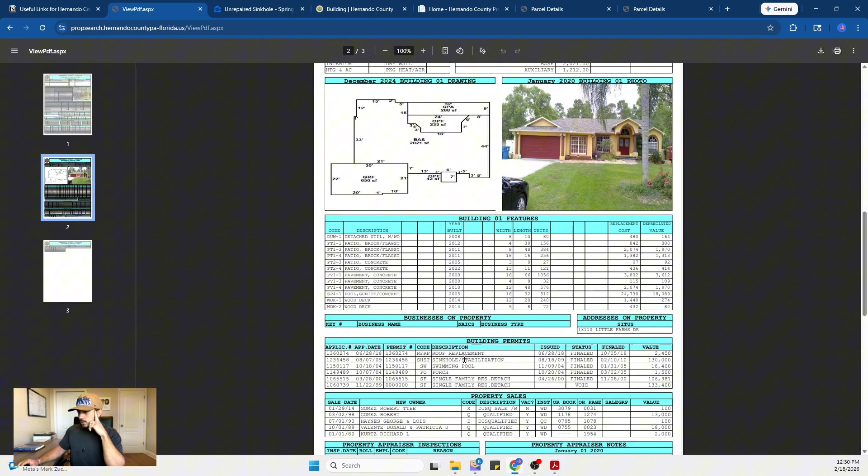Right here, sinkhole stabilization. This is also where you can find other permits, like this one has a roof replacement, a swimming pool, and then when it was built in 2000.

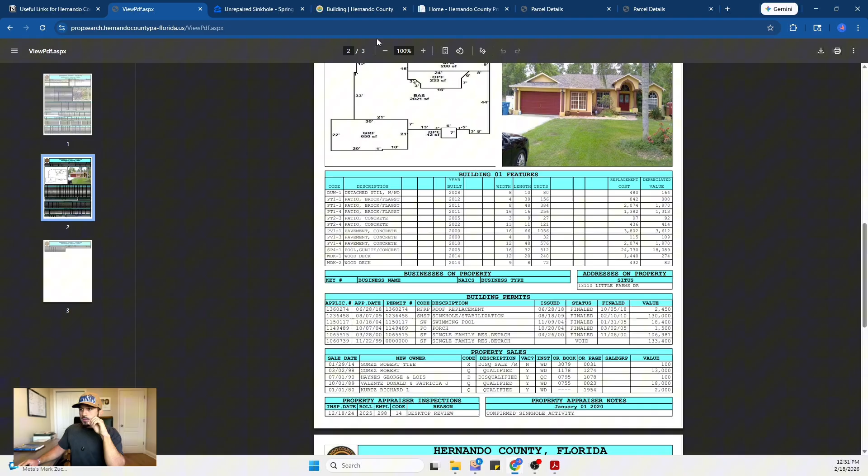To see when a property has an unrepaired sinkhole, like this one, for example, I pulled up this and I have a quick little... what's it called? Tip, I guess you could say.

If you use Zillow, which I use along with the MLS, but Zillow is sometimes easier, especially for unrepaired sinkholes, you could do a keyword search like unrepaired sinkhole or unrepaired settlement if you're specifically looking for them, because it'll be in the description. Typically, the agent will put unrepaired sinkhole or settlement or something like that.

You could also do this for anything. So if you wanted to look up, say, office, it'll show properties that have office in the description.

So not a lot of people know about that, but I figured that could be helpful. Back to what we were talking about though.

If we go to the property page for that property on Lima that I just showed you on Zillow, you'll see that it says unrepaired sinkhole here in red. So that's the easiest way to check if a property has a repaired sinkhole or an unrepaired sinkhole. The property card will not have this disclosure on it. You have to look here, and you can also check the building department.

Of course, when I wanted to do this and pull information from it, they're undergoing an update. They're changing the system, which Hernando County was due for, so that's good to see, but just bad timing as I'm trying to record this video.

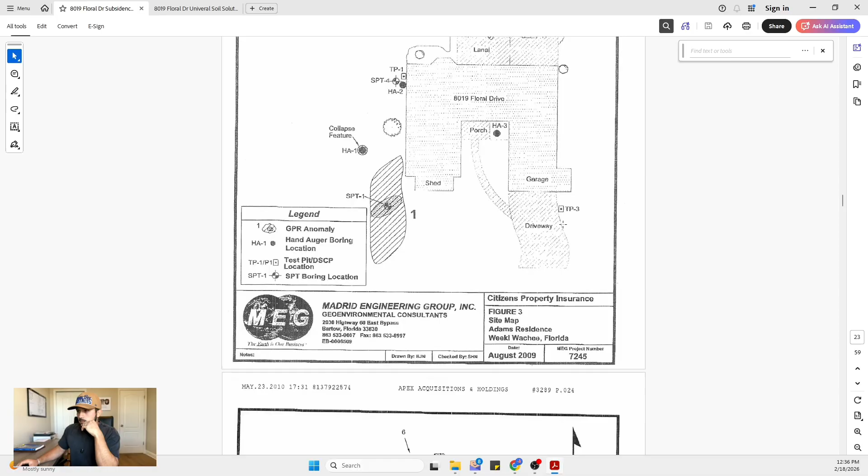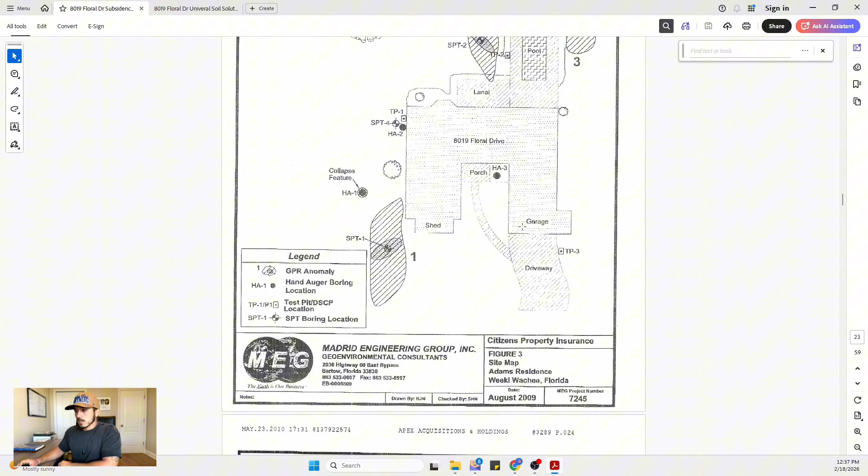This is the investigation report for a sinkhole property. So an engineer, this is made by Madrid Engineering Group. I won't scroll through all of it because it's a lot of words, but if you were looking at a home and you wanted to read through this, you could. It tells you how they investigated the home and what conclusion they came to. And then there are some pictures here showing you what they found. So as you can see here, there were these little voids around the property, and it was enough to say this is sinkhole activity and warranted a repair and a payout from the insurance company to get the repair done. I will just keep scrolling a little bit to show you what else this report includes.

But next we'll look at the completion report and show you what work they did to remediate it. Here's another larger scope, so a hand auger boring log. And this is, as you can see, Client: Citizens Property Insurance. So that is the insurance company that was filing the claim, or insuring the claim, I guess. And then you can see there's notes here: very loose, very pale brown sand, grades to very dense, medium dense.

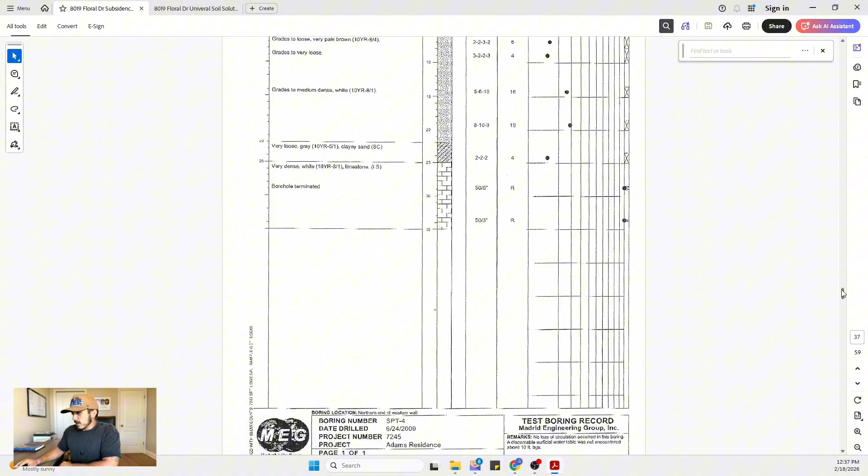It's just very technical stuff, engineering stuff. But if it helps you feel a little bit better, they also have a full writing of what they did here. So this stuff is all available to you if you have a repaired sinkhole property or unrepaired. This will just be the report that shows why it's an unrepaired sinkhole.

Once the property is repaired and permitted and done, you'll get a completion report, and that'll show you and describe exactly what was done. So in this case, there was chemical grout pumped into the property. And then you can see here, this is the cover letter. You have all the pinpoints of where they put piers and chemical grout.

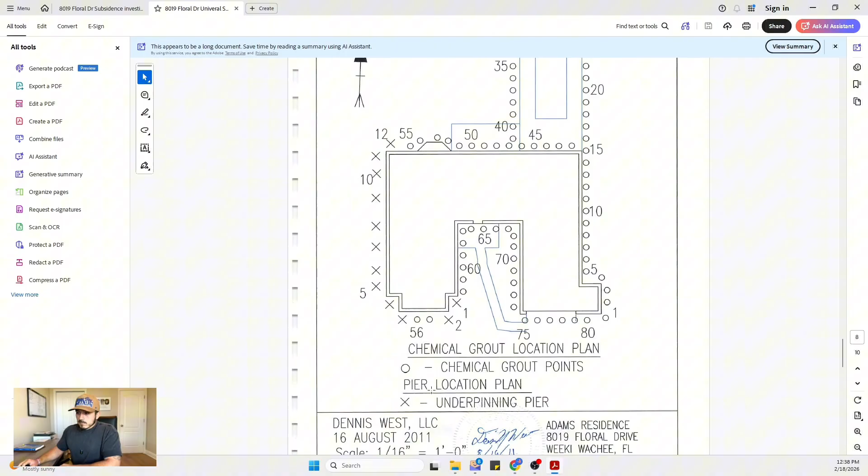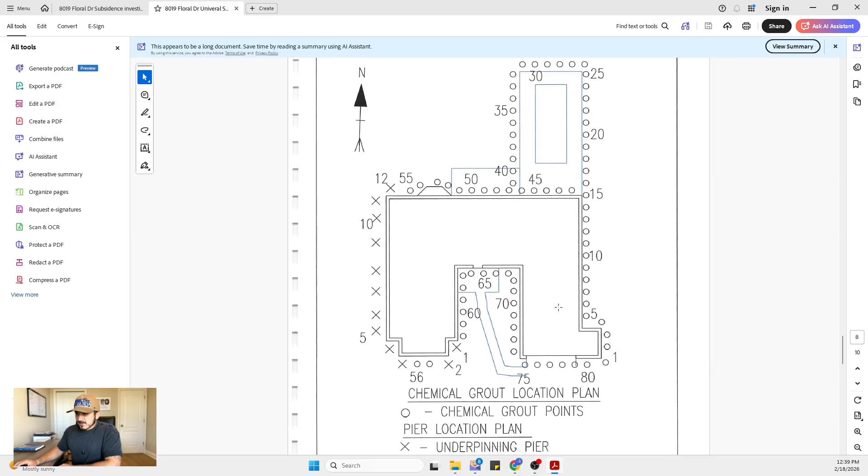So this is an underpinning pier. The X's, the circles are chemical grout points. So you can see what they did to remediate or stabilize the house, so if a sinkhole did happen, the home is secure. So there's prevention, and then with the grouting, and then piers kind of hold the house up. And you can see what was done and how it all works here. It's very technical and it's a little bit out of my league, but I'm just showing you how to find it and what you can do to kind of put your mind at ease regarding some of this stuff.

I'm just here to share information with you guys on how to research sinkholes in Hernando County.

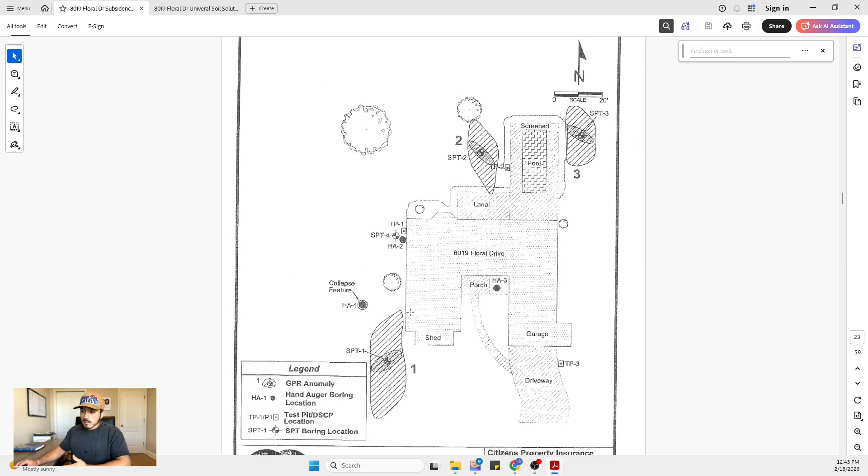There's going to be a lot more cases where it was even less severe than this, or some cases where there was more sinkhole activity. But as you can see here, there were just 3 locations that they found as soft spots, or locations that they investigated, and found enough evidence with the home to say there was a sinkhole. That might be different now if you went back to this property, since insurance companies aren't paying claims anymore. That's why I go back to the fact that those insurance claims really exaggerated the whole sinkhole thing in Spring Hill, because if somebody investigated your house now for a suspected sinkhole, I bet the bar is a lot higher to claim there's a sinkhole, because it's a big deal to get designated as a sinkhole for insurance purposes.

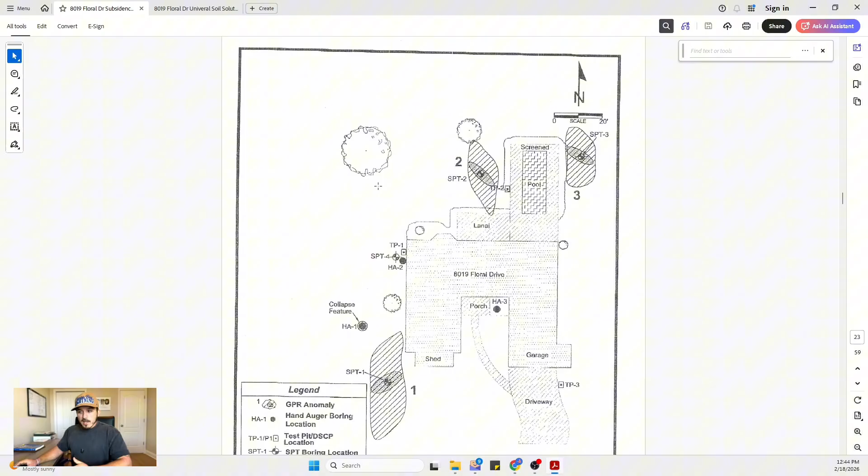It costs a decent chunk of change, probably 20 to 30,000, to repair an unrepaired sinkhole at this point. Insurance companies aren't paying it anymore, so there's a little more weight that it carries than in the past when insurance companies were doing the repairs and accepting claims. So enough of that though.